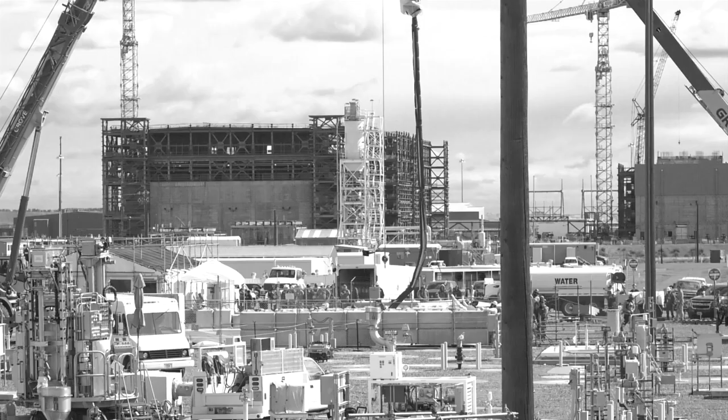Beginning in the 1940s, the Hanford Site in Washington State produced plutonium to be used in nuclear weapons. Over the next 4 decades, that production effort resulted in the generation of 56 million gallons of chemical and nuclear waste that is currently being stored in 177 underground tanks on the site. The management, treatment, and ultimate disposal of the waste is part of the environmental cleanup effort managed by the U.S. Department of Energy. DOE recognizes the urgency of the cleanup mission and the need to make safe and efficient progress.

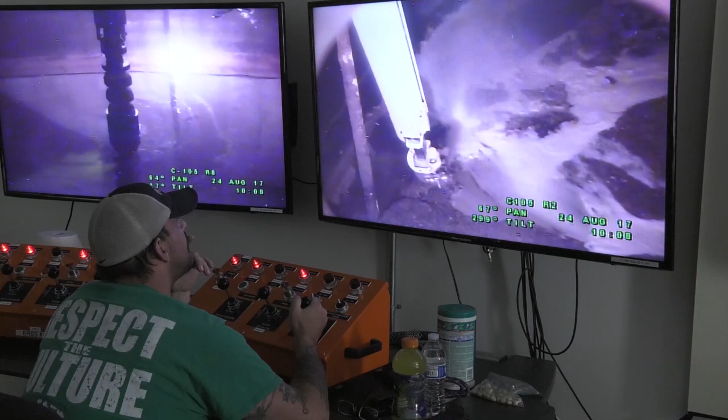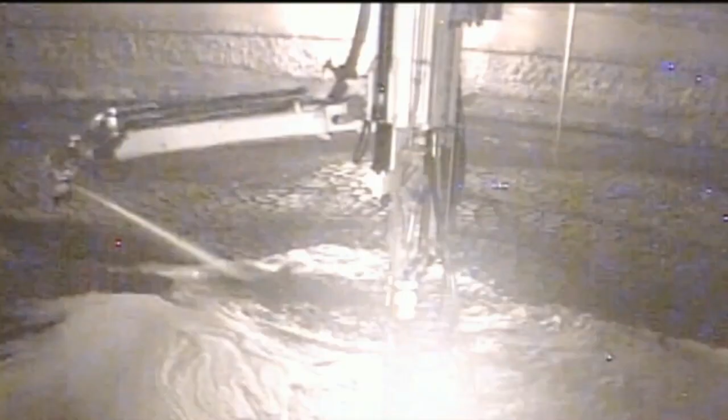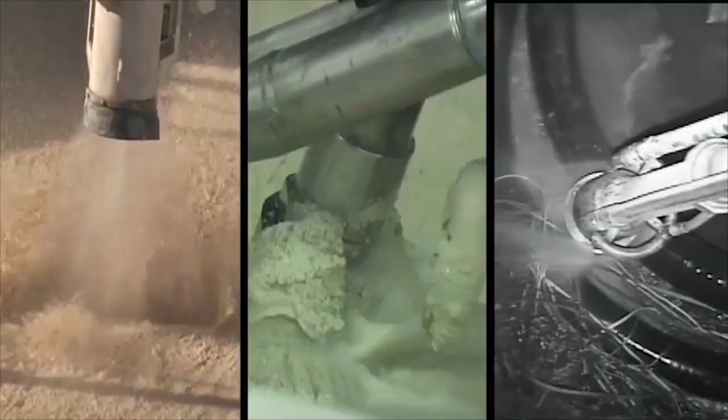The tank waste cleanup mission is being accomplished using a phased approach, beginning with direct feed low-activity waste, or DFLAW. This approach maximizes near-term risk reduction and begins disposition of the most mobile constituents of the tank waste. The Hanford Site encompasses more than 580 square miles along the Columbia River in southeast Washington. Each of the underground storage tanks at the site contains a unique mixture of chemicals and radiological waste from multiple processes during the site's production mission.

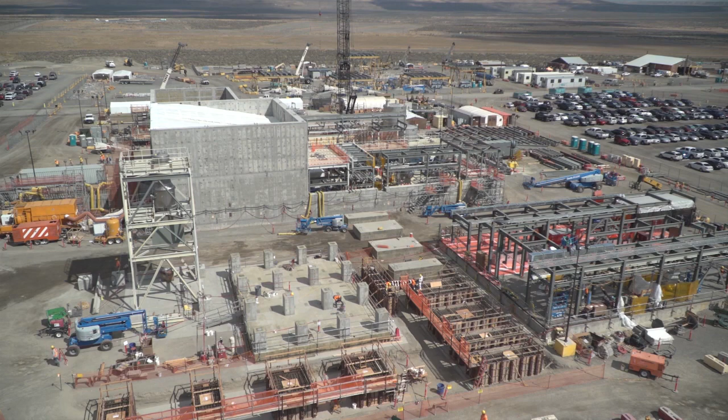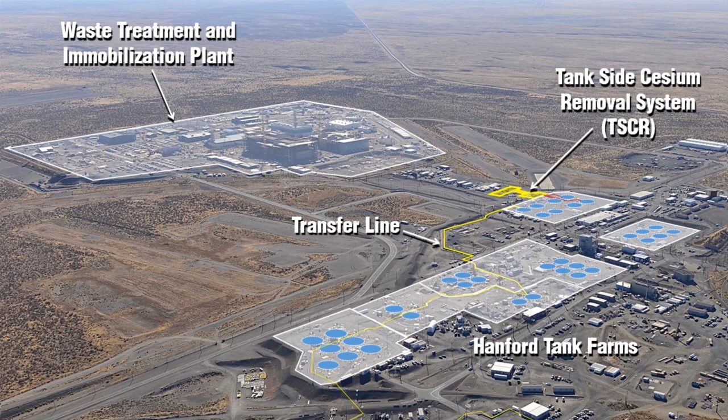To now, the focus has been on the design and construction of the waste treatment and immobilization plant, which will vitrify some of Hanford's tank waste. Today, however, that mindset is shifting from designing and building to starting up and safely operating the facilities needed to begin making glass with the DFLAW approach.

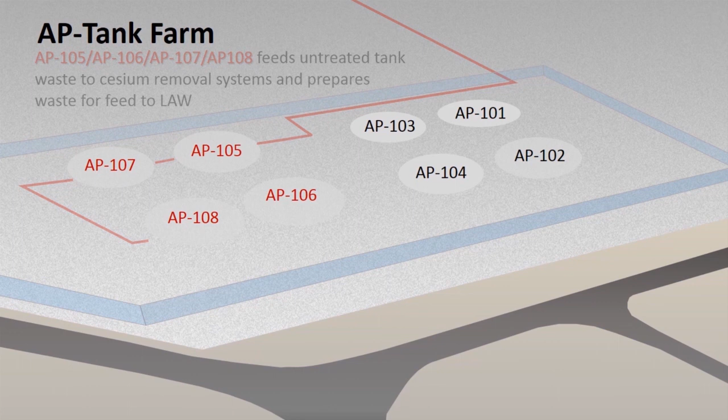Waste retrieved from single-shell tanks and transferred to double-shell tanks is being consolidated in the AP Tank Farm in Hanford's 200 East area, where the tank waste will be staged for treatment. From the AP Farm tanks, the waste will then be fed to the tank-side cesium removal system, or TSCR, which will utilize technologies safely operated at the Fukushima cleanup in Japan and the Department of Energy's Oak Ridge site in Tennessee to remove cesium and prepare the tank waste for immobilization in glass.

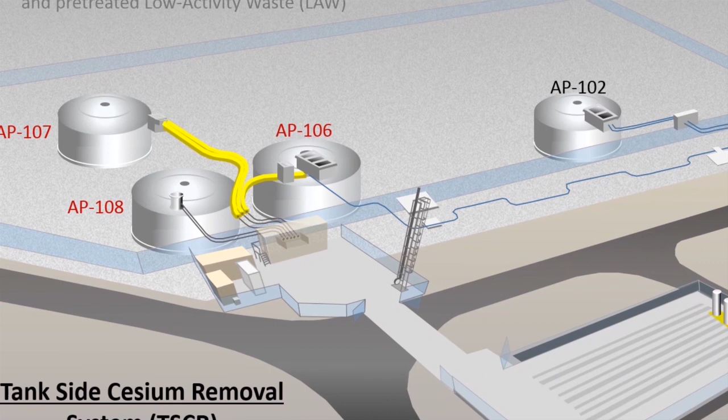By developing tank-side technologies for tank waste treatment, DOE is generating a more efficient and cost-effective method to treat Hanford tank waste that will inform decisions about how best to provide treatment capability over the life of the effort. The flexible and modular configuration of the TSCR technology, which uses a proven ion exchange process, will allow DOE to provide a reliable initial feed for treated waste as other strategies are evaluated.

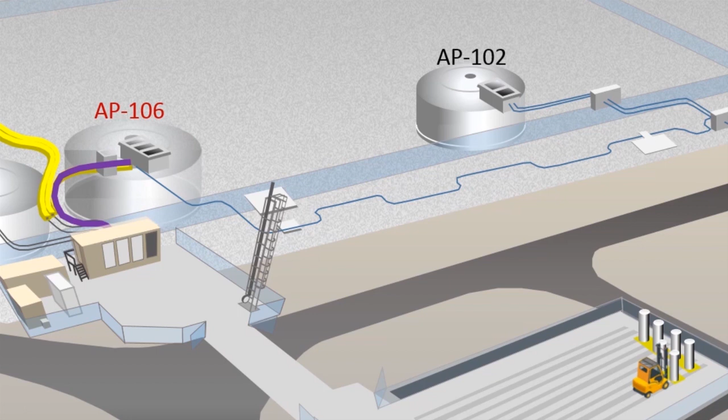The cesium removed from the tank waste will be captured in ion exchange columns and stored on a concrete pad adjacent to the TSCR facility, while the treated low-activity waste will be returned to a separate tank, known as AP-106, for transfer to the low-activity waste facility.

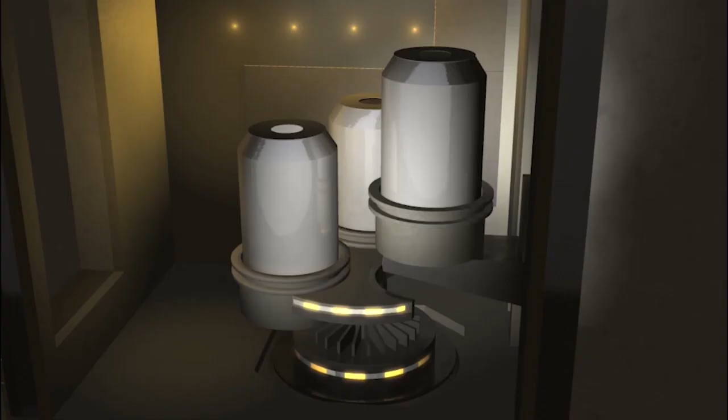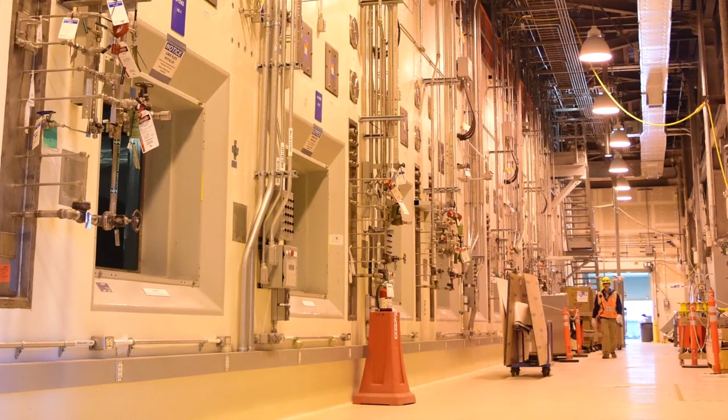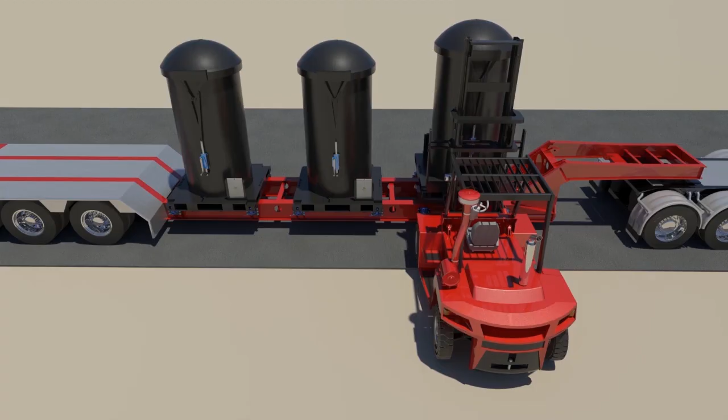The waste will be transferred by pipeline to the low-activity waste facility, where it will be mixed with glass-forming materials to produce a solid glass, or vitrified waste form, in stainless steel containers. Each batch of waste sent to the low-activity waste facility will be sampled at the analytical laboratory to determine the recipe of glass-forming materials needed and then verify the vitrified glass meets regulatory requirements for disposal. From there, the containers of vitrified low-activity waste will be transferred to the on-site integrated disposal facility for long-term disposal.

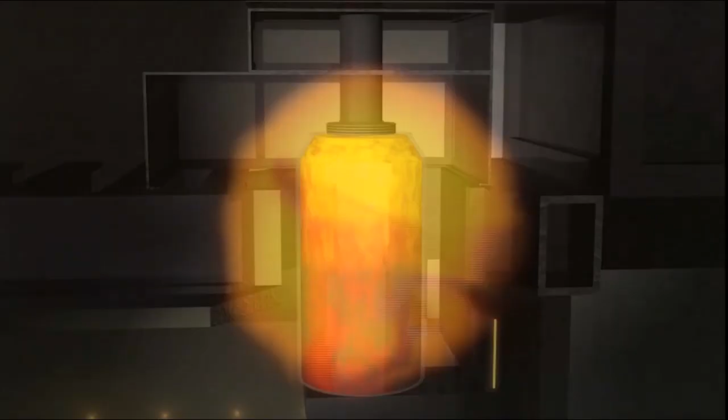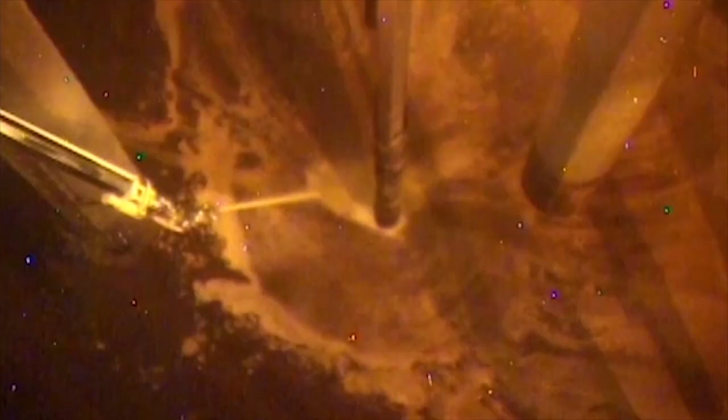Over the first 10 years of operation, the DFLAW approach is expected to yield a number of important benefits for the Hanford cleanup mission, including an overall 24% reduction in the long-term environmental risk of the tank waste legacy. This approach allows DOE to begin the treatment and disposal of the most mobile constituents of the tank waste, and will provide valuable lessons learned to aid startup and commissioning of other portions of the waste treatment and immobilization plant, which will address the high-level tank waste.

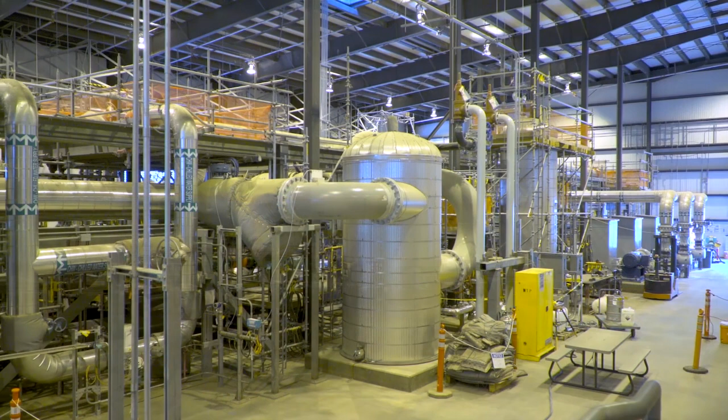DOE and the Hanford Site contractors are aligned and integrated, focused on delivering the waste treatment capability needed for waste immobilization and final disposition of all Hanford tank waste. The Department of Energy has reached a critical point in the DFLAW project with the start of tank waste treatment just around the corner. The department is working to strengthen relationships across contractors, regulators, national laboratories, and our local and regional communities that will enable us to start treating waste as early as 2022.

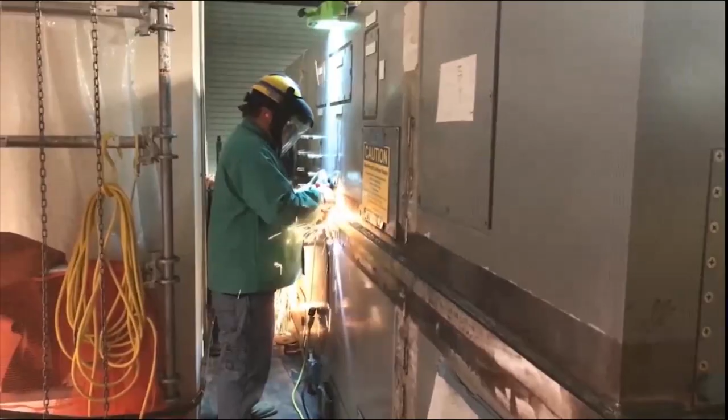The success of the DFLAW project will be the result of years of dedicated efforts by so many to the long-term safety of human health and the environment, and will mark a significant achievement in the overall Hanford cleanup mission.

It's an exciting time for Hanford. We're getting close to starting up a major processing facility, which, since Purex has been down, is a major operation activity. So we're really excited about that and getting it moving.

Low activity waste has been contemplated since about the 2006 time frame, with lots of studies since then. In 2012, we had technical issues at the high-level waste facility and the pretreatment plant, so we decided to start up 80% of the WTP, which included LAW and the balance of facilities. We entered into agreement with the state through the consent decree on starting up LAW in 2023.

Since then, we have a new capital facility called Low Activity Waste Pretreatment System, which has been changed to the Tank Side Cesium Removal System. We'll talk about that as we go through this. So let's look at our placemat here, and we'll start from the left to the right.

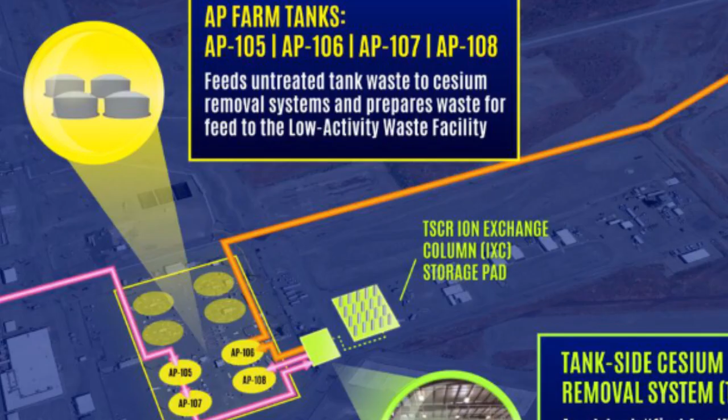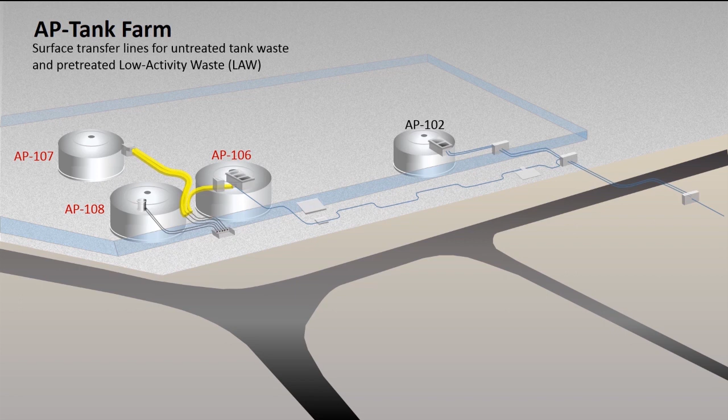You can see on the left the AP farms. Those are the newest farms we have, built and put into place in 1986. The feed from those tanks will be going through low activity waste. For the first 5 years, we anticipate about 5 million gallons of tank space will be created through that process.

You can see there's 4 tanks here that we're going to have to upgrade. We're doing design of the upgrades right now to put in new pumps, new piping, infrastructure to feed LAW. The advantage of doing low activity waste first is we're going to create double shell tank space, so instead of building new tanks and using that capital, we want to process the waste toward its ultimate disposition.

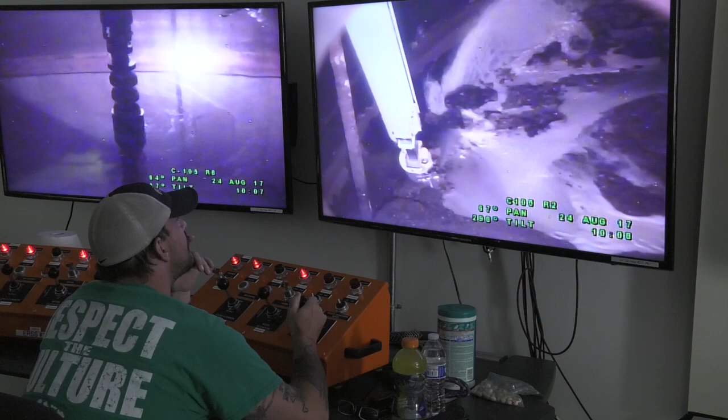Over a 10-year period, we think we're going to get about 12 million gallons of tank space, which is pretty significant. In addition, low activity waste is a lower hazard category than the pretreatment high level waste. So if we get our processes, procedures, and people trained, and operate that facility first, that makes a lot of sense before we go into the higher hazard facilities.

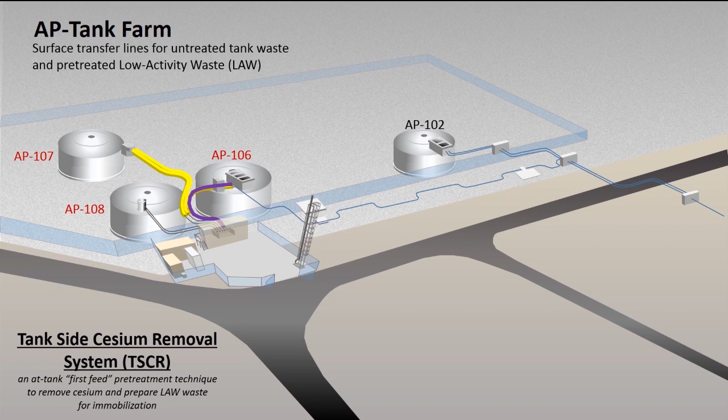So you can see the upgrades there. That feed will go through what we call tank side cesium removal, which is probably a change from what you heard before, called the low activity waste pretreatment system. The reason was the delivery of that system wasn't going to happen in time to meet the consent decree milestones. The design got too complicated, and construction, it became a major facility.

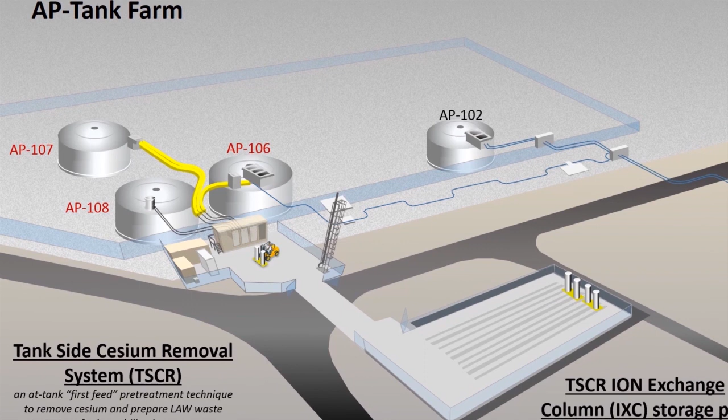When we start up, WTP has a ramp-up rate, so it's not going to start out at full capacity—it's going to ramp up over a certain period of time. We believe this system will provide, at 5 gallons a minute, enough feed to get through a 5-year period of time.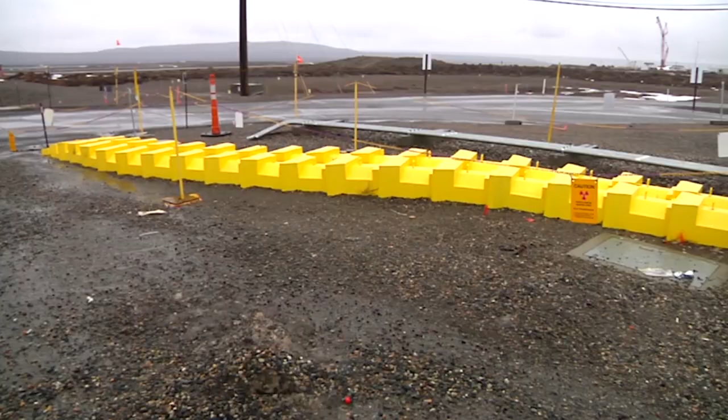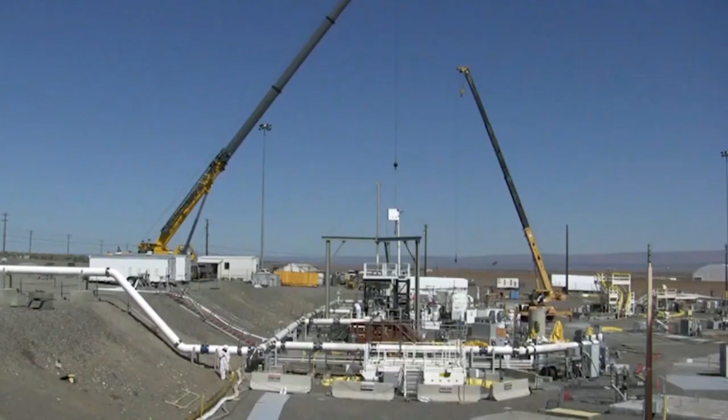And then we'll have to make a decision on what the final design could be. It could be this system with permanent piping, because right now we're going to use hose and more of a non-permanent system. But this will inform the final design of the way to remove cesium out of the feed.

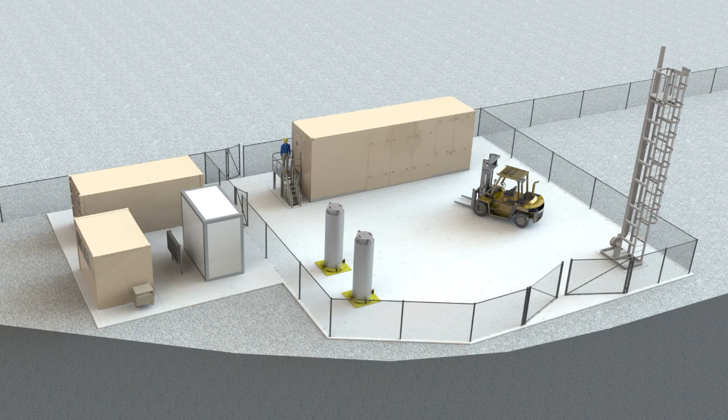So for TSCR, we actually awarded a contract to AVANTech out of South Carolina. If you've read the news lately, they have teamed with MCE, a local company—they bought that company. So they'll be doing the fabrication and testing. That's been awarded, and we're in the process of getting a decision to get the infrastructure into the tank farms also. We're trying to get this online by 2021 so we can process about 1 million gallons of feed to support a 2022 startup of low activity waste.

Is there any questions on the TSCR concept?

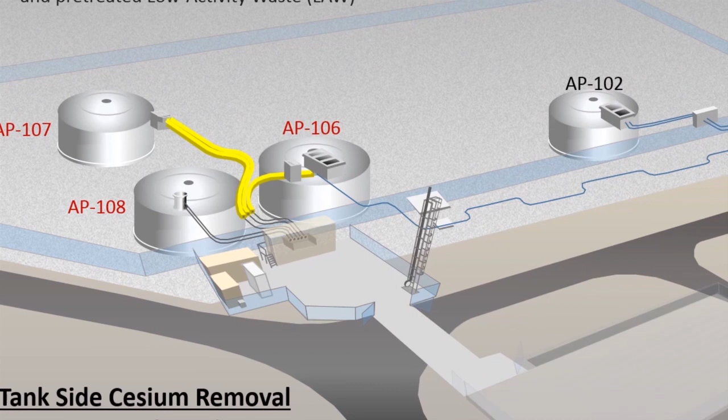And they have a lot of experience with Fukushima. They actually removed cesium out of the water from the reactor issues they had. You can see that one of the changes from the low activity waste pretreatment system to the concept we have now is what we call elutable versus non-elutable ion exchange.

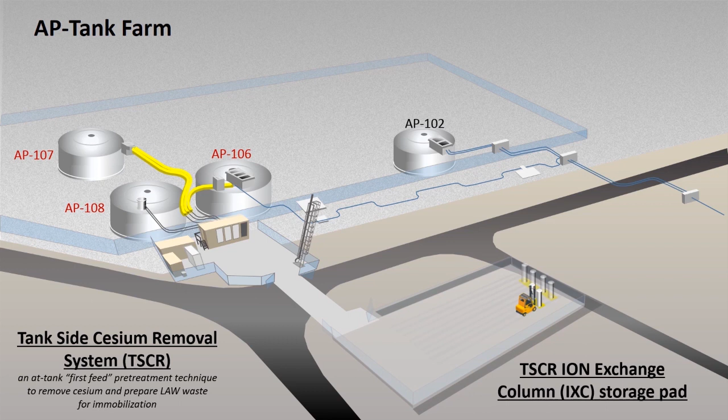What we were doing before was elutable, which means we wash the cesium off the ion exchange column and put the cesium back into the tanks. Now, once we remove the cesium, you can see that ion exchange column pad there—we will be storing those ion exchange columns until final disposition. That disposition could be a repository, or right now we're thinking once the high-level waste melter comes on board, we can process that through it. Savannah River's looking at the same thing.

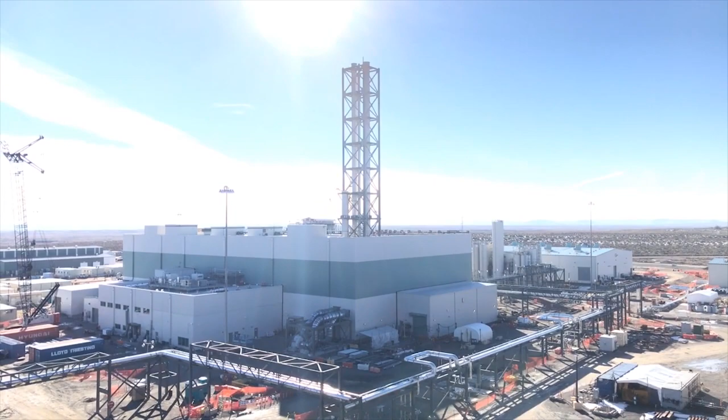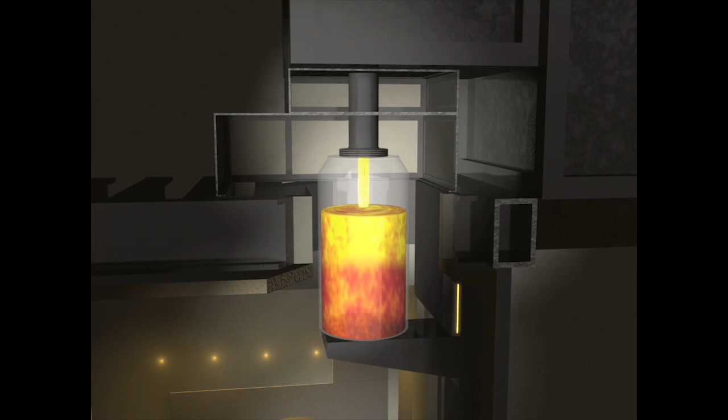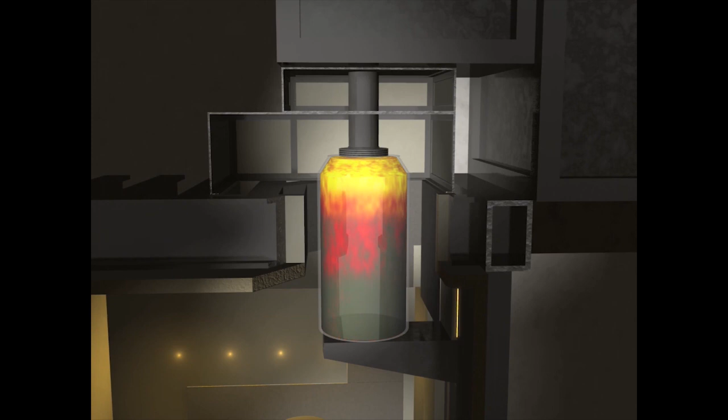So as we move to the right, you'll see the low activity waste facility. This is where you put the glass formers, mix it with the waste, heat it up to 2100 degrees, and pour the glass into stainless steel containers. Everybody thinks it's canisters, but canisters are high-level waste by definition, so we call the low activity waste ones containers, but they're still stainless steel. You've probably seen the containers to the right of the facility out at WTP.

We just finished validating what we call physical construction complete, meaning most of the construction is complete. We don't have the control systems in place yet, and there are some other exceptions, but for the most part LAW and the balance of facilities and the laboratory are nearing construction complete. All the mechanical and civil work has been completed, and a lot of the wiring's completed, though some terminations still have to be finished.

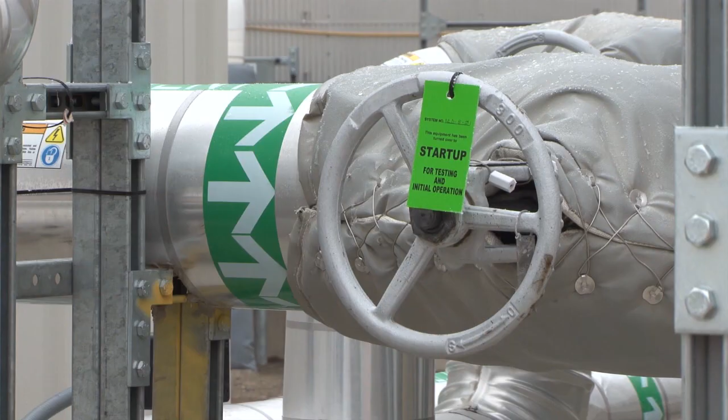The good part is we've pivoted from a construction to a startup mentality. We've turned over 50% of the systems from construction to startup, and we've turned over 5 facilities from startup to operations. We're actually on permanent power, we have water systems in place, and we're slowly turning over steam, compressed air, and other systems from startup to operations. About 50% are still in startup mode.

So the plant out there is significantly changing. If you walked into the LAW facility, it's hard to get around now because all the doors are in place, so it's not wide open anymore. It's all drywalled in, and the doors are in place so we can do HVAC testing. So it's pretty exciting.

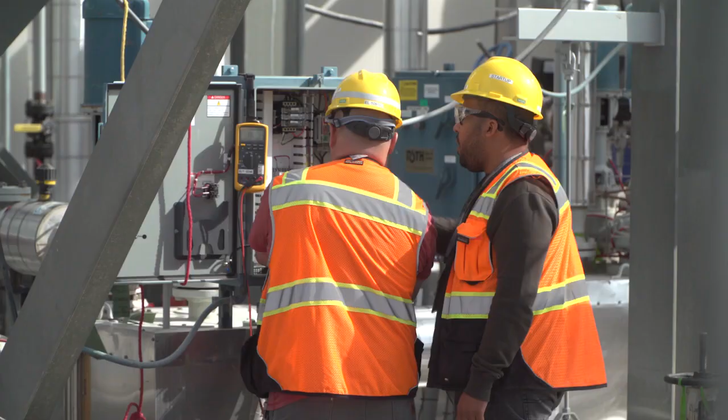Which means we have a change in workforce also. We're changing from construction into operations mode, so we're in a transition, bringing up conduct of ops principles and other things. So we have cultural changes that are ongoing — when you're going from construction to operation, there are significant cultural changes.

The other part is the analytical lab. We've got an operating permit — we worked with the state and they issued us an operating permit for the lab. We gained lessons from that because we have the effluent management facility, which we'll talk about in a second. We're going to ask for an operating permit for that and LAW. So going through that process, working collaboratively with the state, we appreciate their work on that. We got that permit, which is significant.

So you can see everything's focused on operations right now. We still have construction, but we're really focused on pivoting to operations, which is significant.

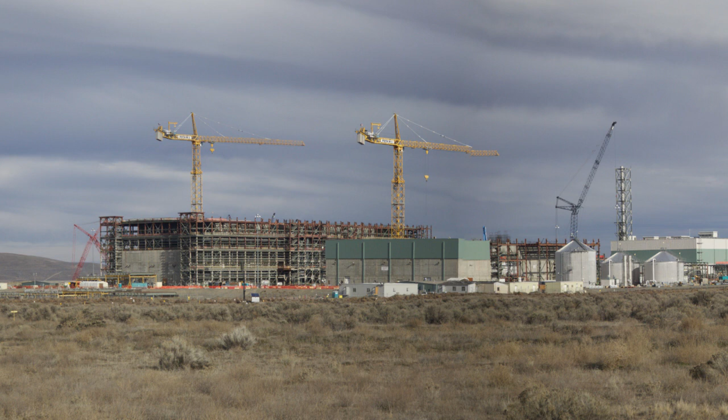But all the walls have been poured. We're getting ready to place vessels, and this is on schedule to support that. As part of making that decision, this facility had to be constructed, so it is on the critical path. And then to the right you see the low activity waste plant. Like I said, we just validated the construction complete milestone, physical construction complete, and we continue to do testing and turnover of that facility. We're looking to get this started up as soon as 2022.

There's other activities that are important to know also — not only in our budget do we have to be aware, but for Richland Operations Office, they have significant support to this. They have the water systems that have to be upgraded, power.

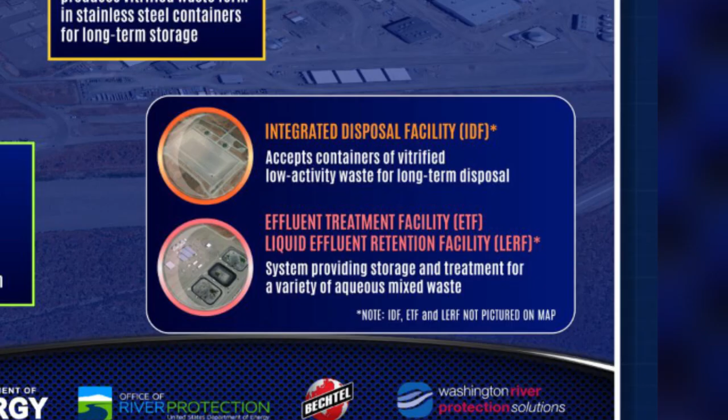Right here you see the integrated disposal facility on the bottom, in the orange bottom right. That's where all the glass containers are going to be stored, and the secondary waste, that final waste form, will also go into that facility. So that has to be permitted, it has to be licensed, and some upgrades are needed too.

So Richland has some significant upgrades that we watch as the budget gets approved every year to make sure that's going to support our operations. A lot of people don't realize that — so when they come in $100-something million low for the year, we all scramble to make sure we're going to be supported as part of our startup.

Quick question, that facility is located where? Are they all out there in the west area? East area. So do you know where Purex is? It's kind of behind that.

As you go from construction to operations, it has an impact on manpower and workforce. What kind of impacts, and when should the community expect a transition to actually impact this? We're actually ramping up startup engineers and operations engineers right now. If you've seen our budgets, high-level waste has actually been plussed up, so we're looking to minimize impacts to design engineering by rolling them over to the HLW facility. We were looking at transition plans, and we do all the time, because that's going to happen, so it takes significant notifications ahead of time.

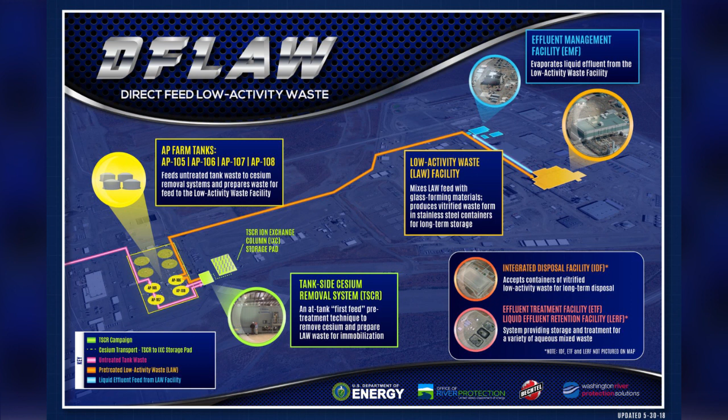Then they make a recommendation to me. I'm actually the startup authority to go ahead and do a readiness review, which is independent, to go verify procedures, processes, and people. After that review, you decide if you're going to start up or not based on the risk. So the key is we go into a cold commissioning phase. There's not as much radioactive concern as there is chemical concern, because there's a lot of chemicals in this. Usually you'd do this review for hot commissioning, which would be entering radioactive operations, but we have to do reviews ahead of time because of all the chemicals—that's the hazardous constituents we're really worried about if you look at our hazard analysis.

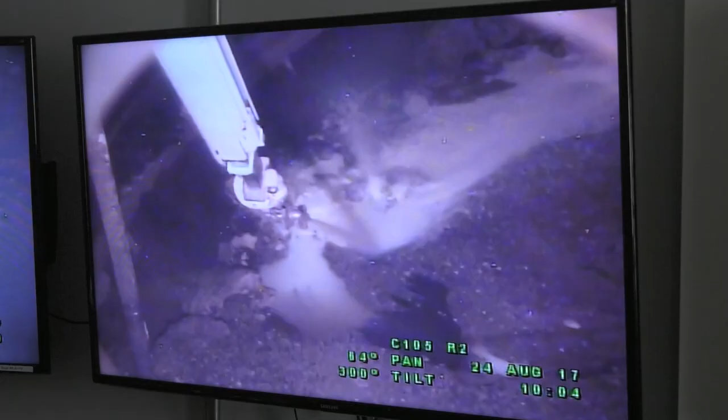Well, it's my understanding that 80% of the waste is going to be put through this low activity waste facility. That's a big jump, and it's going to be very important. It is. If you look at it, we've got 56 million gallons, and some of that's in salt cake, so we have to dissolve that—so it's not 56 million gallons, it's 160 million gallons of waste we process.

Most of it goes through low activity waste, but it's always been envisioned there would be another supplemental treatment, because pretreatment generates so much low activity waste you need a supplemental treatment to keep up with it. Through glass formulation improvements and other improvements, what we envisioned for that supplemental treatment years ago was going to be 3 times the size of that LAW facility. We've reduced that to less than that now, and we continue to try to make improvements so we don't have such a supplemental treatment need. But it all hinges on when you want the mission done.

Right? I can extend the mission and run everything through there, or I need some kind of supplemental treatment to get the mission done earlier, because that's what drives it. High-level waste drives the mission if you have enough LAW capacity. LAW drives the mission if you don't have the capacity there.

Yeah, well, I think the state's super excited because there is very much progress on direct feed low activity waste ahead of the consent decree deadline of 2023. And our team, I think, has been working really well together with the Department of Energy on all the permitting and things necessary for this.

I think the big change for us was going from the low activity waste pretreatment system that they had originally envisioned to the TSCR. We're still learning about TSCR. It's still being designed currently, so we don't have details yet on how it'll operate. A little bit of concern that it's got a really low flow rate compared to what the low activity waste pretreatment system was going to do, and we just want to make sure that once we've got all these systems ramped up that we're really optimizing them, using them to their capacity to the extent we can.